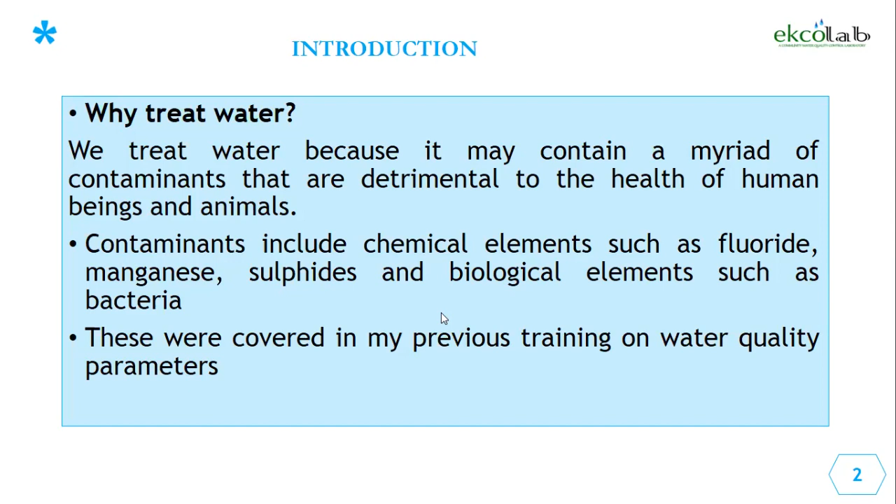And if you drink water with, say, E. coli, you get waterborne diseases, cholera, bilharzia, things in that line. These were covered in my previous training on water quality parameters. Next slide. So I categorize water treatment methods into two, that is physical methods and chemical methods. Next slide.

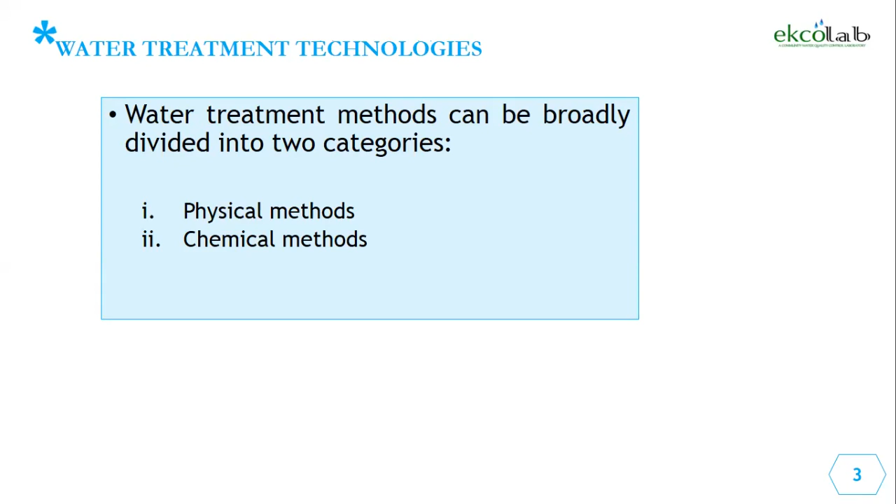Physical methods employ filtration techniques aimed at removing solids of various sizes from the water. With physical methods, a membrane is used, that's why we call it physical. But with chemical methods, we add some chemicals or employ some chemical process in order to treat the water. For now, we're going to deal with physical methods. Next slide.

They include the following. One of them is the use of screens. Filtration through screens is done at the beginning of water treatment processes to remove large materials. If you have visited a water treatment plant, at the very first step, where there's a river and the water is being abstracted, there's a screen placed there to filter off the large solids.

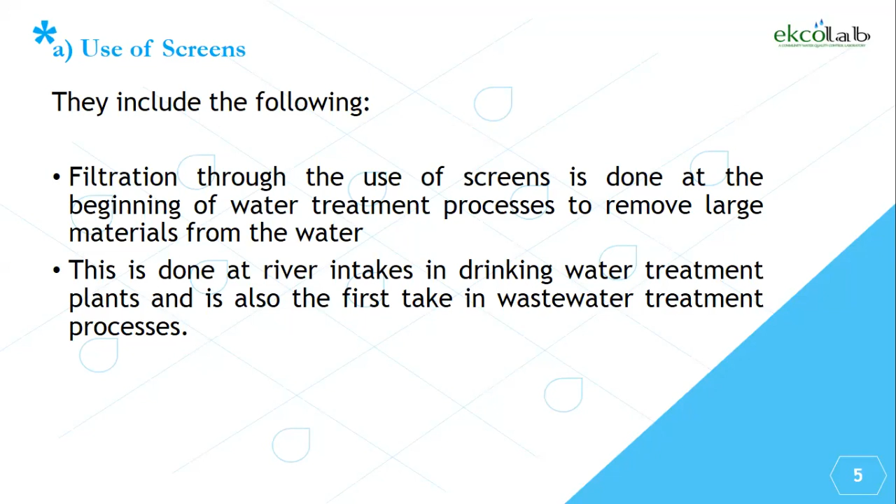This could be rags, twigs, rocks, such that the water coming through is free of these big solids. That is done in a water treatment plant, and it is also the first process in a wastewater treatment plant. They need to remove the solids because if they proceed to the other stages, they might ruin the equipment in the wastewater treatment plant. So next slide.

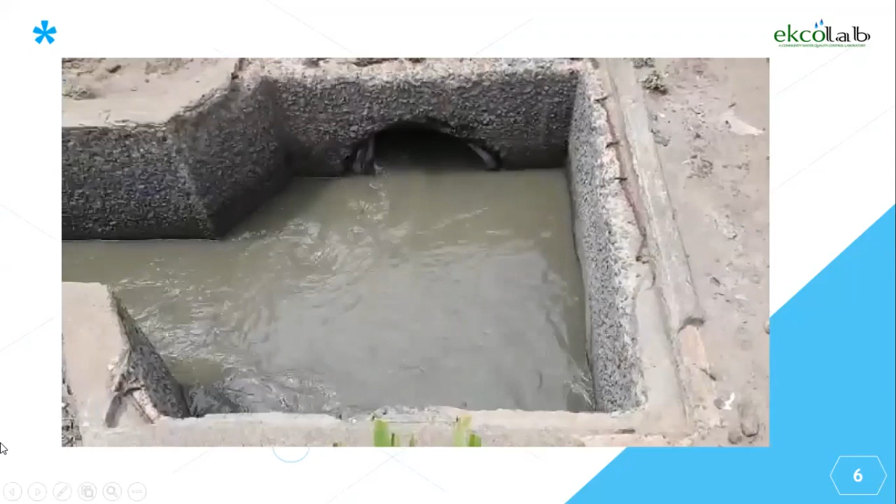This is supposed to be a video, Mr. Ekole. Yeah, play. So this is a wastewater treatment plant. That's the water that is coming in.

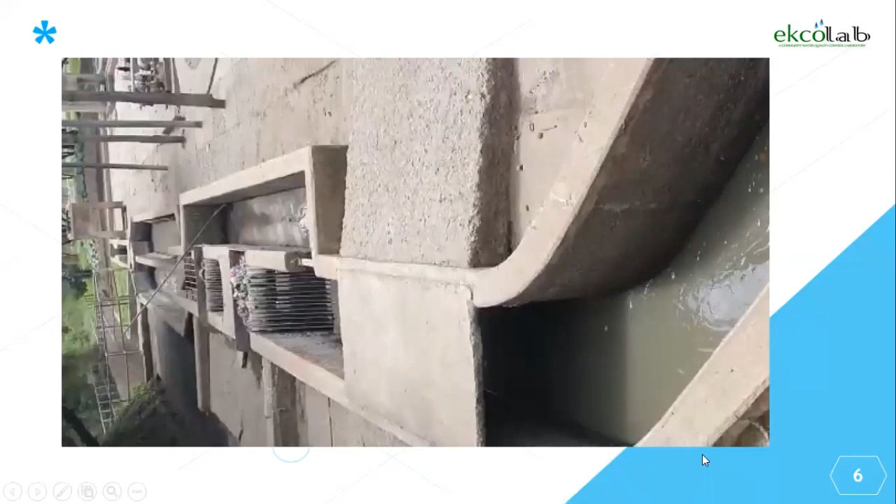And if you twist your heads a bit, you will see the screens on there. And that is what I meant by use of screens. So that's the first step in physical treatment methods. Yeah, that's what you have on there. Those are the screens. Usually the bars are the screens.

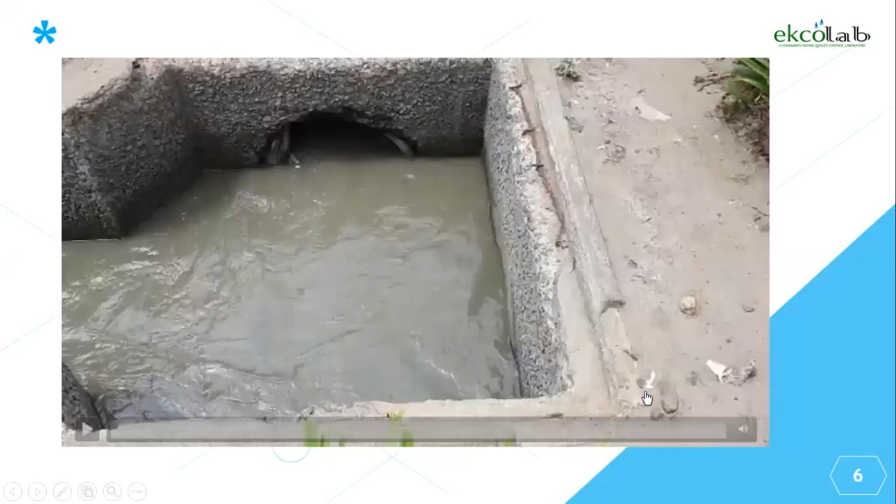You see, if you can see some bars. Go back to the video, please. The last step, yeah. If you look at the screen, there's a solid bit; those look like papers and rags that have been filtered off from the water. So that is the use of the screen. Yeah, this is in a wastewater treatment plant.

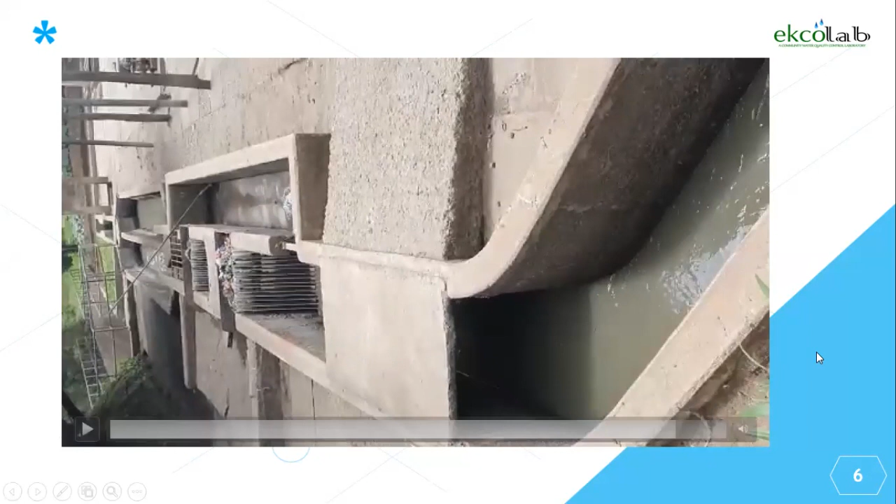A water treatment plant will have, say, a river, and the water flowing into the water treatment plant is free of these big solids. So the second physical method is sand filtration, which is a technique used to remove suspended solids from water. And this consists of multiple layers of sand of various sizes. When water flows through the sand filter, the suspended solids are trapped within the sand layers as residue, and the filtered water flows through. The next slide will show.

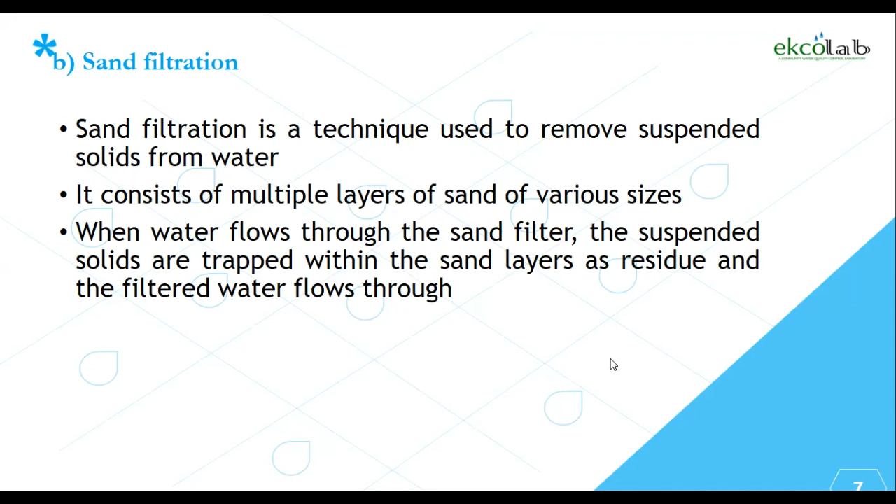And this is a way in which groundwater gets filtered as it flows through the ground, such that wherever you go to abstract it, you find that it is somewhat clean physically. You won't see the dirt. Yeah. Next slide.

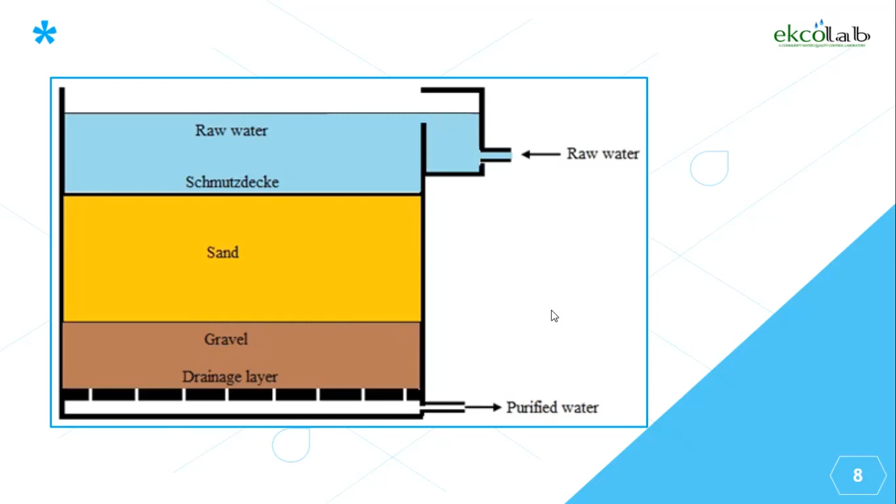The next one is membrane filtration. In this technique, a membrane is used to sieve off particles and molecules. Several techniques can be applied here. So the first technique in membrane filtration is microfiltration. Yes, Mr. Ekole?

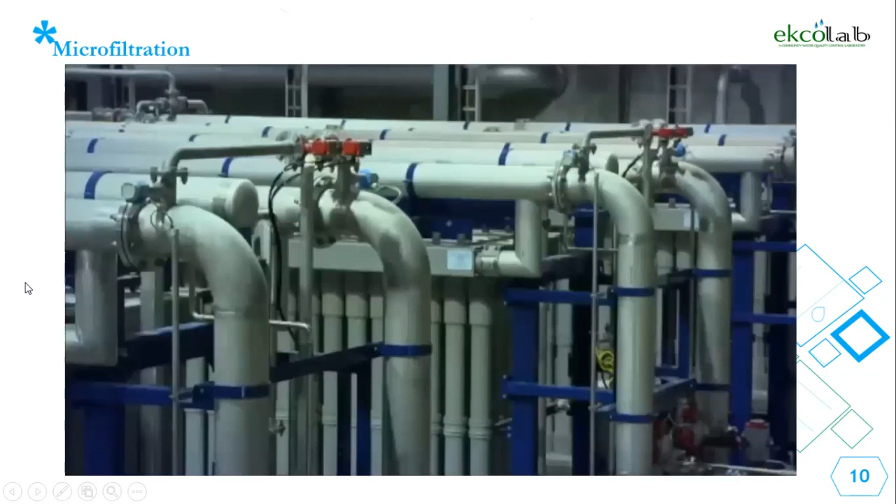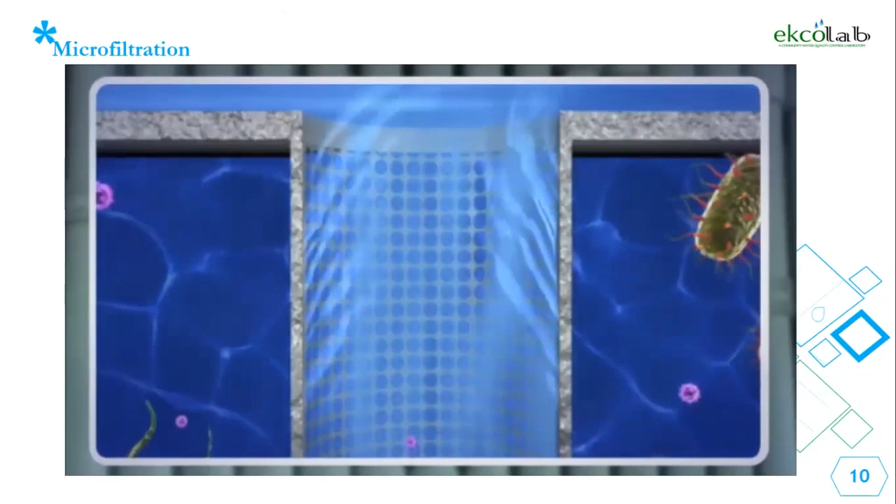So this is a video on microfiltration. During microfiltration, water is forced through racks of vessels, with each vessel containing thousands of hollow fibres. The outer wall of each fibre is made up of tiny pores only 0.2 microns in size, or about 300 times smaller than the width of a human hair. The fibres filter out microscopic particles such as silt, protozoan cysts, bacteria, and even viruses.

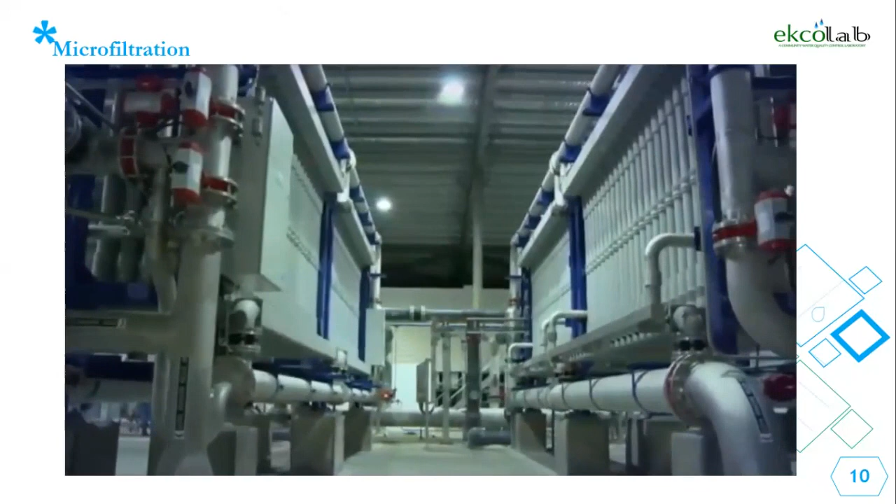Microfiltration vessels are backwashed every 30 minutes to remove any build-up of particles on the membrane walls. The backwash water is returned to the pre-treatment tank for reprocessing. This helps the plant recover a higher amount of pure water.

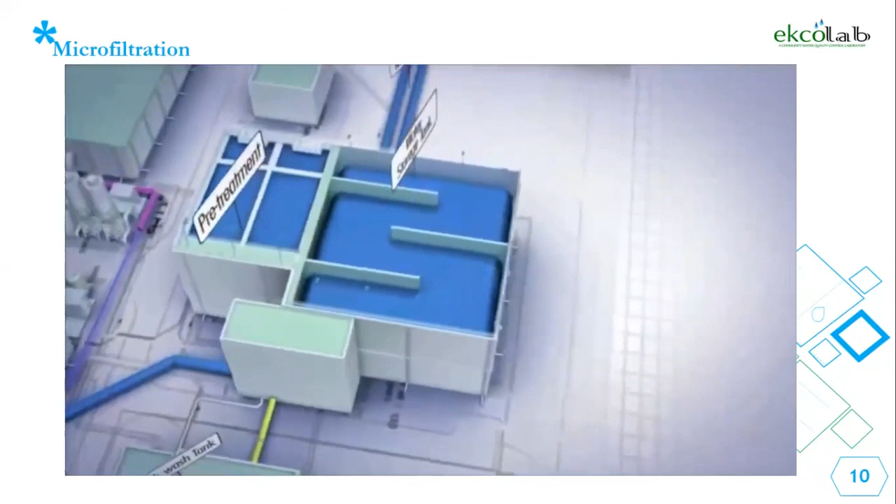So that was a short video on microfiltration. I'll go back to the previous slide with the content. Yeah, so microfiltration is one of the techniques in membrane filtration. And this kind of filtration filters off very fine particles, particle size in the range of 0.1 to 10 microns. It is able to remove suspended solids and bacteria, but does not remove dissolved contaminants.

And as in the video you've just seen, it involves a feed stream being introduced into the membrane under pressure, that is water being introduced through the membrane under pressure, in a controlled flow path. The portion of the feed stream that passes through the membrane, the filtered water, is called the permeate, while the materials that do not pass through the membrane and are ultimately flushed away are referred to as concentrate.

Yeah, so with microfiltration, you get water without suspended solids and without bacteria, but you still have water with dissolved contaminants. As you go further on, you're going to see membrane filtration techniques that are able to filter off particles of very, very small size. So the next filtration technique.

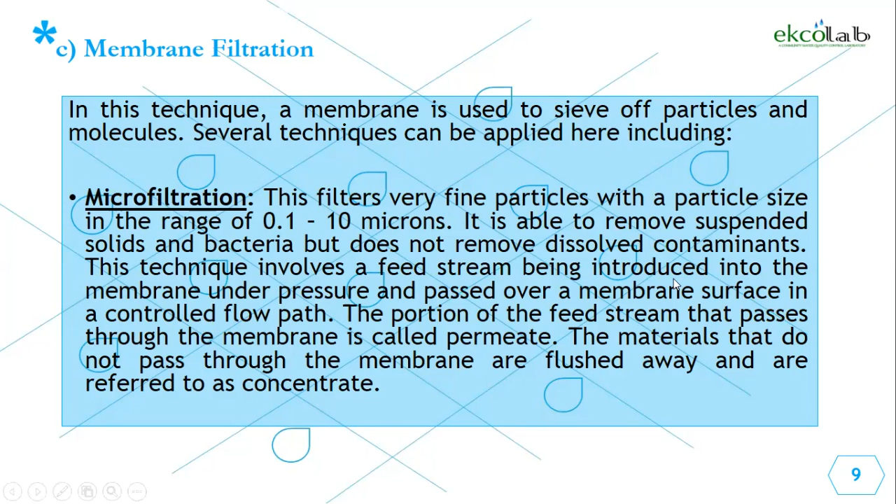The second one is ultrafiltration. I think we had a video on that. Mistakenly, yeah.

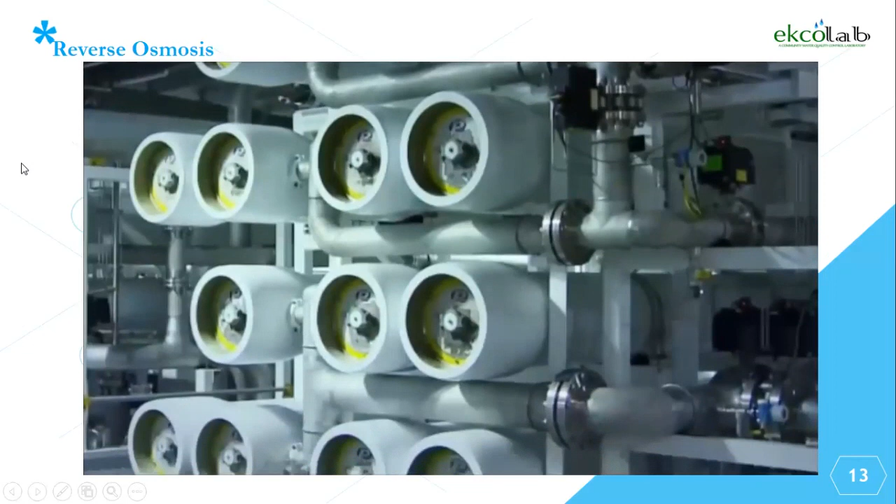Reverse osmosis works by forcing water through a special plastic membrane sheet to remove compounds such as salts, organic compounds, microorganisms, viruses and pharmaceuticals. Rolls of membrane sheets are wound into cylinder-shaped elements. There are several elements inside each long pressure vessel. As water enters the vessel, it flows over the membrane surface as it moves from one end of the vessel to the other. The membrane layer is extremely thin. It allows water to pass through or permeate, while preventing other compounds from passing through.

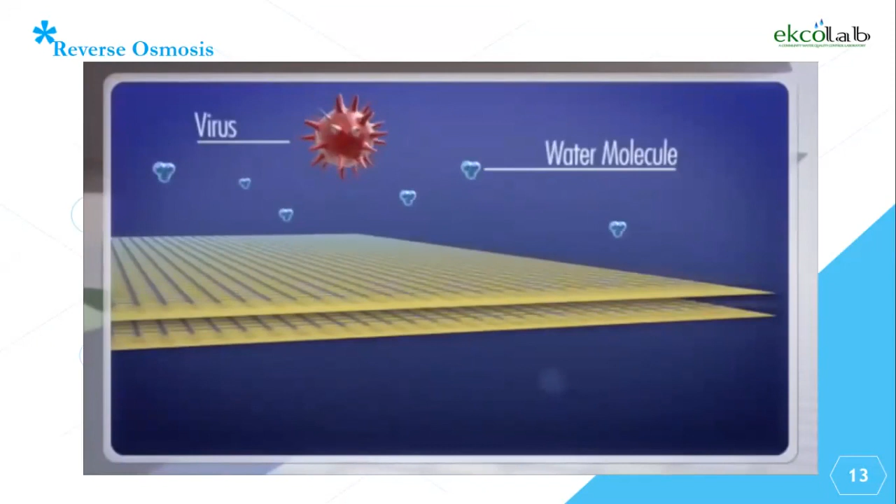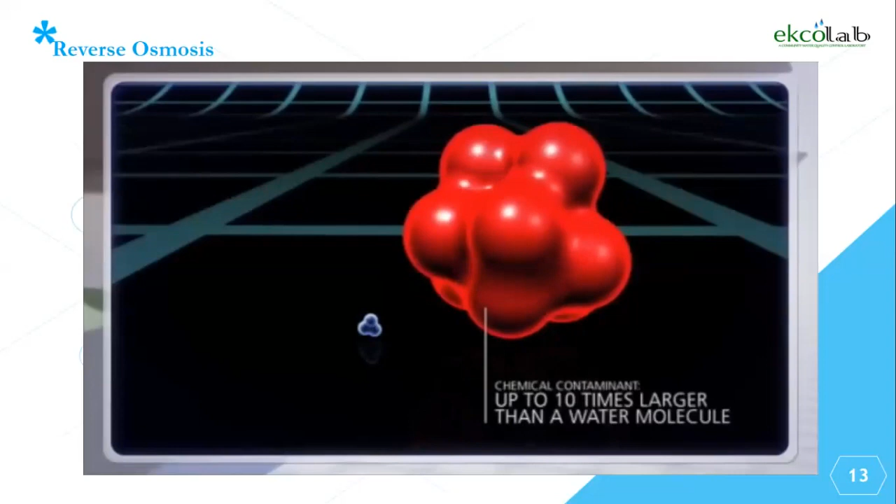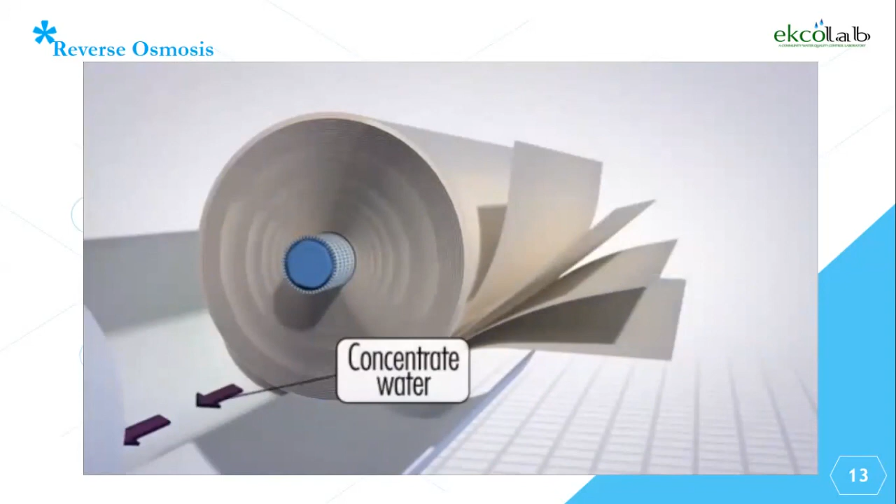Membranes remove molecules based on their size, shape, and charge. Generally, contaminants larger than water molecules will not pass through, including most chemical contaminants and all microorganisms such as viruses and bacteria. Two streams of water are produced. Pure, clean water or permeate flows across the membrane sheets and passes through the membrane layers to the inside core tube. Water that does not permeate becomes more highly concentrated with salts and other substances. This water is called concentrate.

The pure permeate water flows out the core tube at one end of the pressure vessel, and the concentrate water flows out another outlet. The concentrate water can then flow into other pressure vessels for the same process to happen again, so even more pure permeate water can be recovered. About 82% of all the source water becomes purified water.

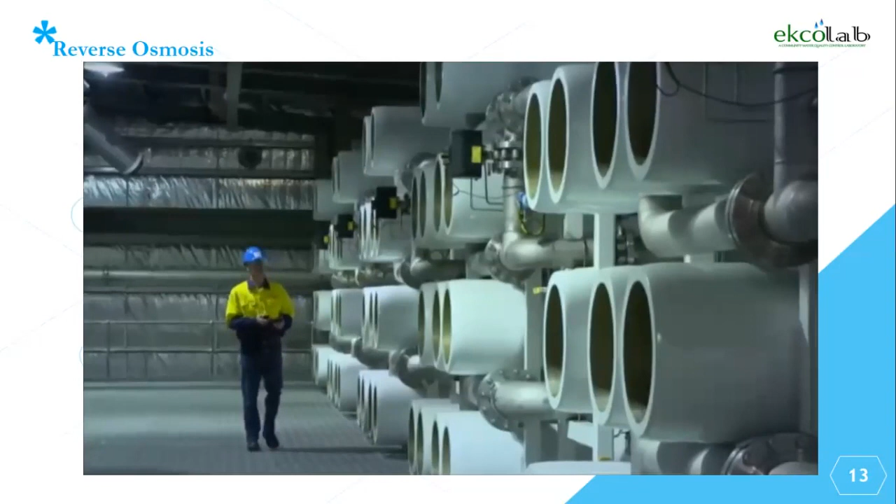So that's it on reverse osmosis. As I said before, this is the most commonly used, and it is really efficient. It removes most particles. The fourth physical technique is cartridge filtration. Cartridge filtration units consist of fibers that are capable of handling contamination levels less than 100 parts per million, that is milligrams per liter, which, as you can see, is not as efficient as the membrane filtration techniques.

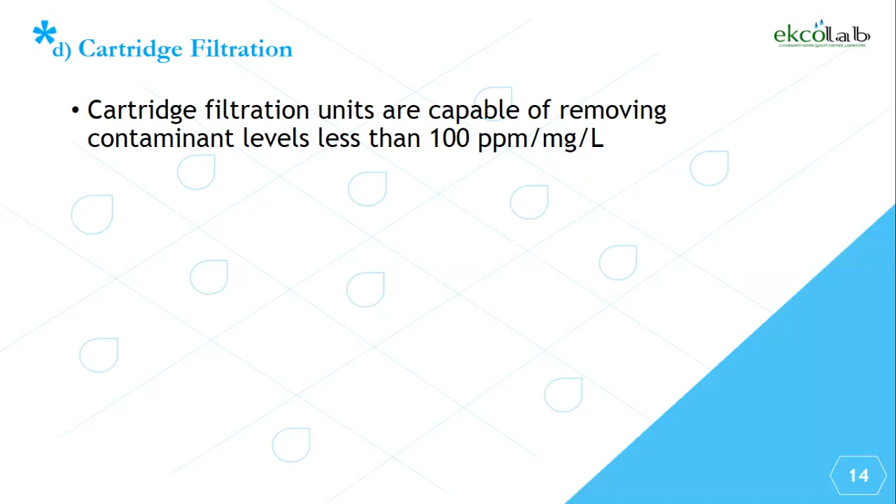The fifth among the physical methods is ceramic filtration. Ceramic filtration is quite different. Most are suitable for use in small-scale water filters, and it consists of a pot with small pores that can filter dust and bacteria out of water. Again, it is not as efficient as the membrane filtration techniques. So that's it with the physical techniques. We'll move on to the chemical techniques in water treatment. Oh yeah, we had a video on ceramic filtration, sorry.

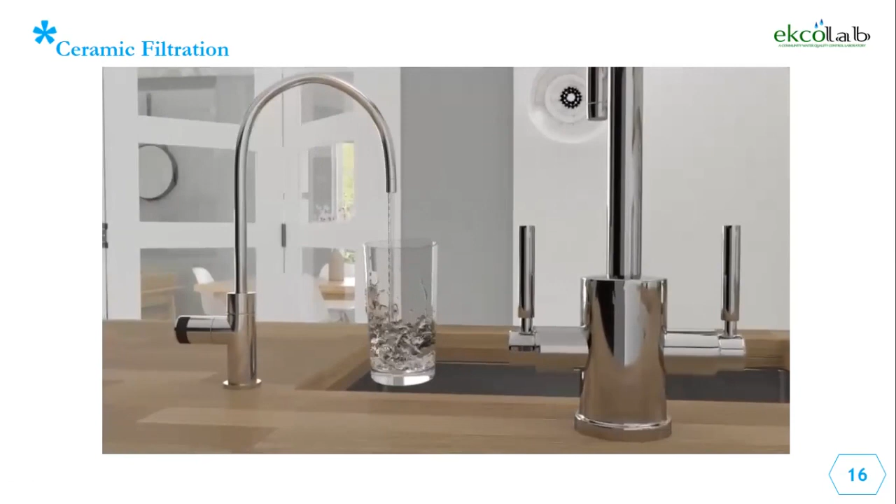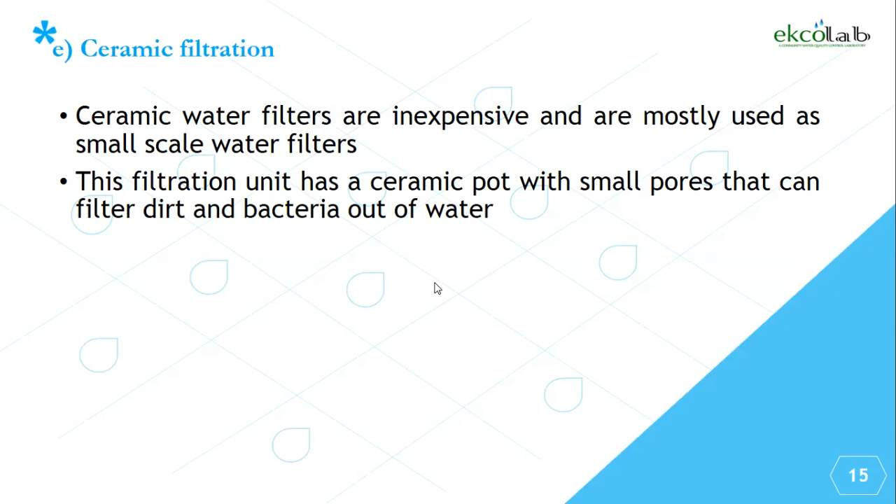Yeah, so that was a video on ceramic filtration. And that's it with the physical techniques. Moving on to the chemical techniques in water treatment. Mr.

Ekole? Okay, thank you. So with chemical methods, chemicals are added to the water to be treated in order to render it palatable, that is safe for drinking, or to render it safe for disposal to the environment. Different chemical methods include the following. Let's start off with chemical addition. Next slide, please. So, chemical addition.

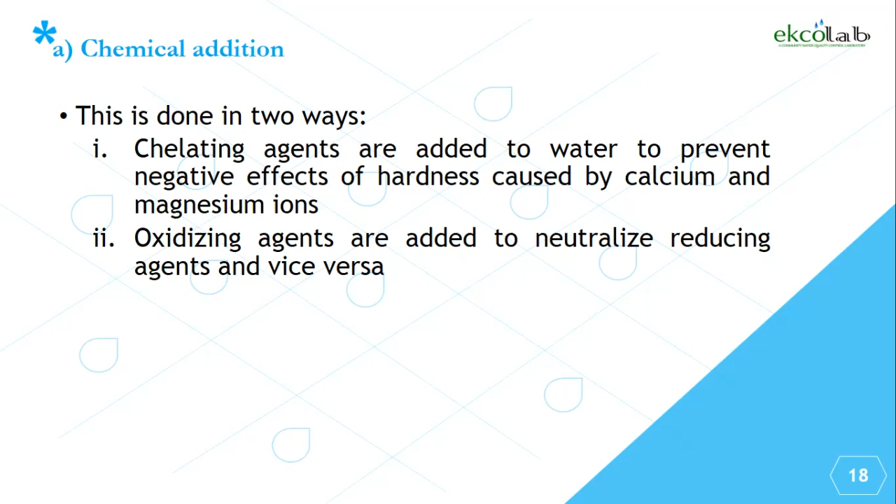Chemical addition can be done in two ways. Chelating agents are added to water to prevent negative effects of hardness caused by calcium and magnesium ions. These are substances added into water to soften it. That is, you have hard water, and you add chelating agents into the water to make it softer. We can also have oxidizing agents, which are added to neutralize reducing agents. You add them into water in order to make it safe for drinking. The next among the chemical techniques is on the next slide.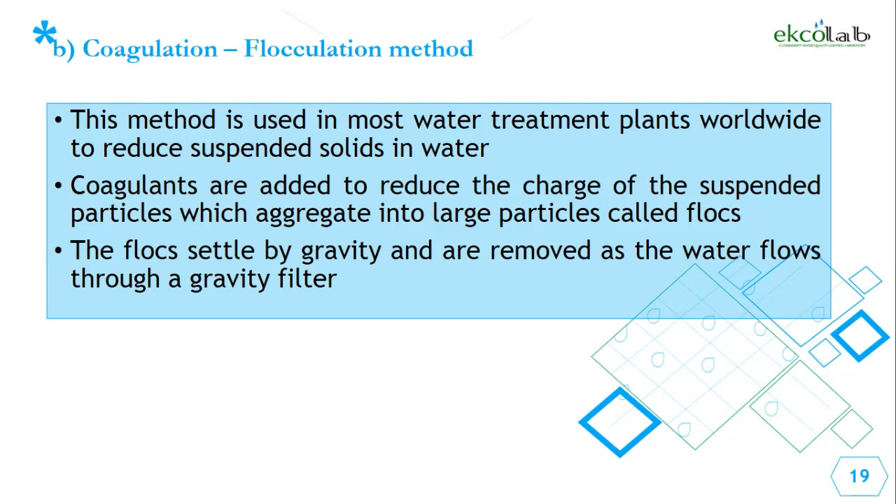the deionization and softening. This one is done through ion exchange, which treats water by absorbing certain cations and anions and replacing them with counter ions. It's basically just softening water, or adding chemicals into water that has a known contaminant, and when you add these substances, they're able to chemically react such that they cancel out the effects that they have on each other. So the first one will have

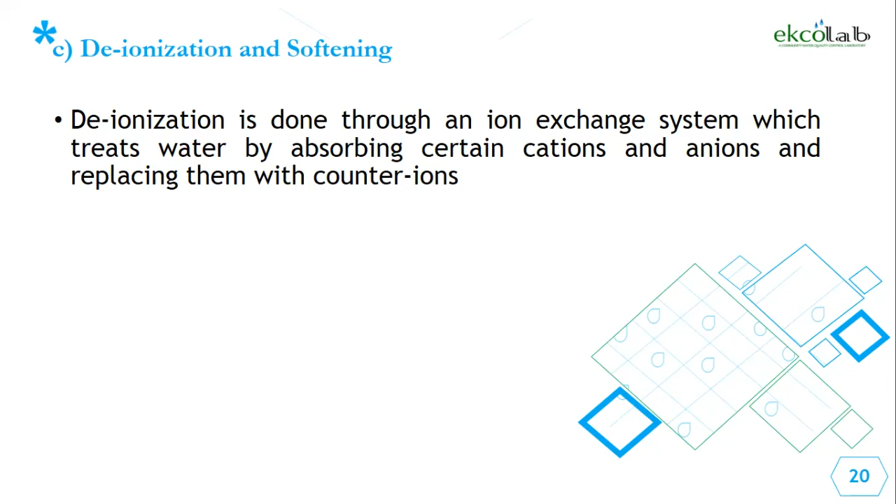So boiling is most commonly used in small-scale household water treatment. And the next one is use of UV radiation. UV radiation, say in the lab, can kill microorganisms, and that is used in water treatment plants. In treatment plants, say a municipal one where we have ponds with the waste, they get the sun, which is able to kill microorganisms that are otherwise hard to manage in the previous steps

in the wastewater treatment process. And then the third one is chlorination, which is basically the addition of chlorine into water, which is able to kill microorganisms. I think at present this is the most commonly used treatment method. It is used as the final step in my country's municipal water treatment process. At the end point, they add chlorine to the water, which is then distributed to the end users.

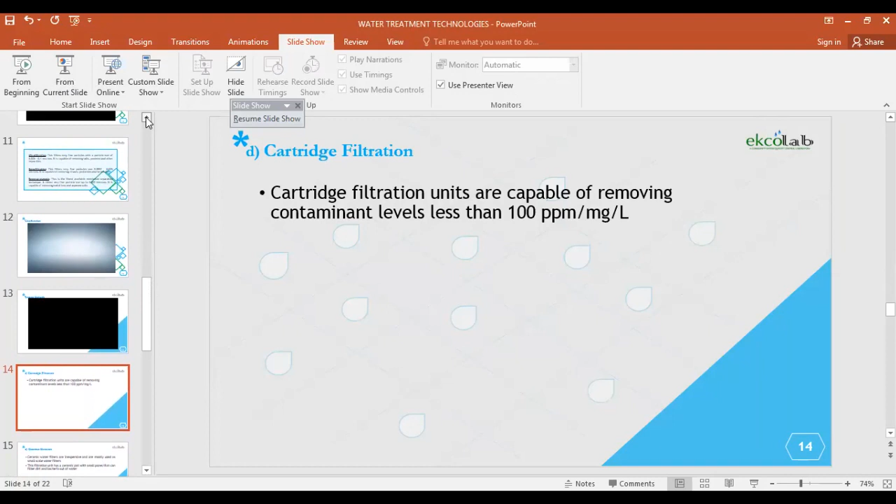So cartridge filtration units, you know, I don't know if asking whether you know what cartridges are is a good thing. But what would I say? You know of printers and the dust. Okay, in our printer, we have the carbon, whatever, the dust that is poured into the thing. Okay, can you take us to the video? So 1 minute. Because just like all these, it's just fibers through which water flows. There is microfiltration. There's no video on cartridge, but I think this is just what we have, unless we talk about ultrafiltration, microfiltration, more or less. We didn't have a video on it.

So, cartridge filtration. I'd say it's basically a cylindrical tube, and inside we have fibers through which water flows, and the fibers have pore spaces, which means they don't allow particles of certain sizes to pass through. And the particle size which I mentioned was 100 parts per million. That is, the particles that are bigger than that can't pass through. It's just a filtration technique as well.

I think it's a great question we have here. I think we have another question. It says, how effective is boiling? Take an example of organisms that form cysts as a protective mechanism. Because I think this question is for boiling purpose, like how effective is boiling? Take an example of organisms that form cysts as a protective mechanism.